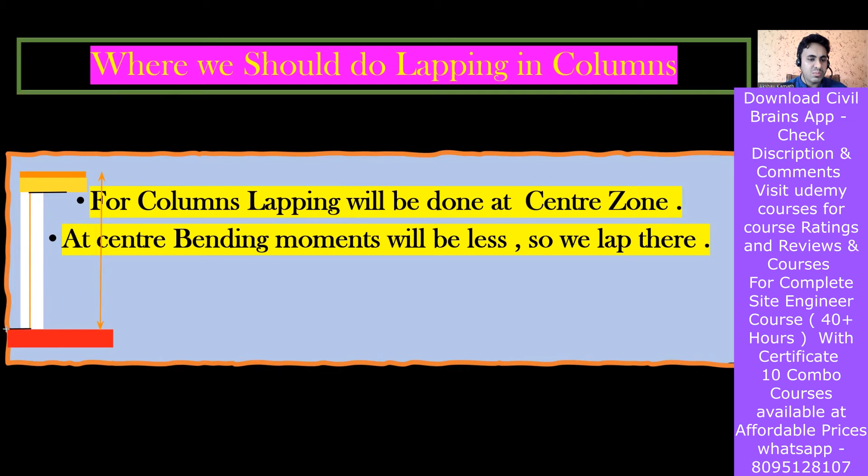The typical bending moment diagram of a column: near the support, here we have maximum bending moment. Here also we have maximum bending moment. And the bending moment becomes minimum in this portion. This is how the bending moment variation happens. Can you see this middle portion? Your bending moment is almost close to zero.

The bending moment is maximum near the bottom and near the top. But as you come towards the center portion, it reduces and finally reaches zero. So this is the zone where the bending moment is minimum, and wherever the bending moment is minimum, we have to do the lapping. If this is the complete height of my column, it comes exactly at the center. So for columns, lapping will be done at the center zone.

Very simple explanation. I've explained the bending moment diagram. I'll quickly make it dark in color so that you get a better idea. Maximum, and this portion is minimum.

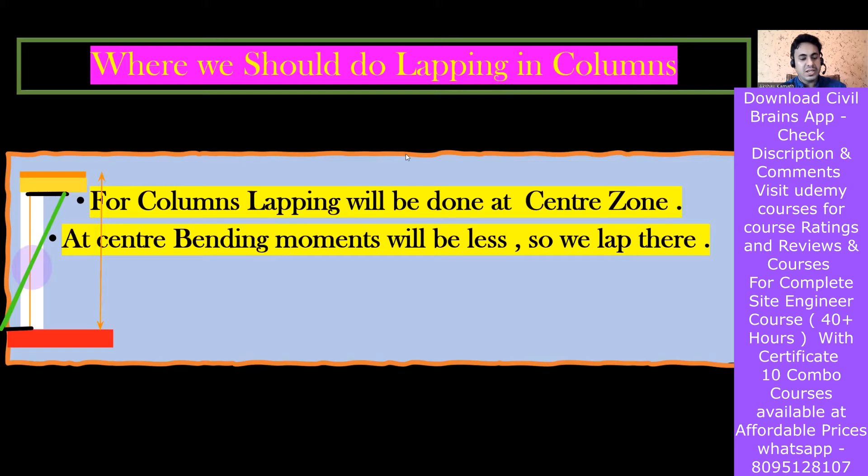Got it? This is how the bending moment variation is going to happen. So in this particular portion the bending moment is 0, or we can say the bending moment is minimum. There I'm going to do the lapping. Now with this understanding, I'll take you to a few of the structural drawings. I'll take you to one of the drawings here.

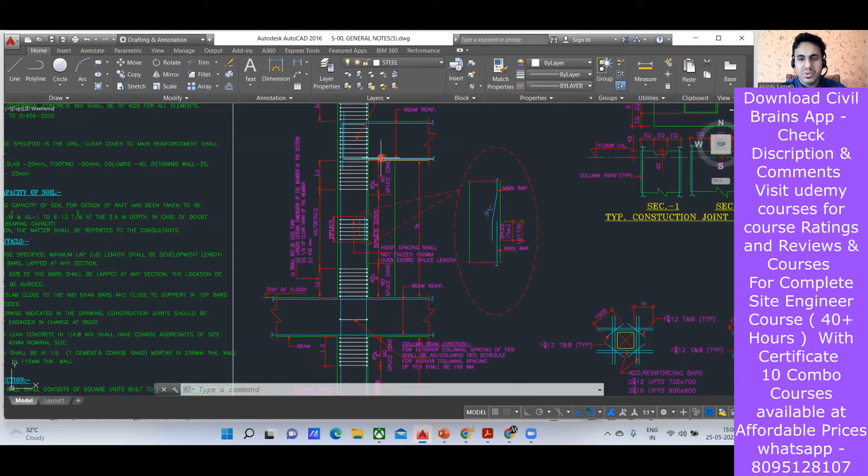See, when you work as a site engineer, you get certain typical drawings, and they are going to mention where you have to do the lapping and where you should not do the lapping. Whatever concept I've explained, you see the same application being done here also. You can see this is the top of a floor and this is the bottom of a beam. This is beam bottom, this much portion, and this is top of the floor.

Now you can see they have written something. Here in the middle portion you can see splice zone. Splice in the sense, I told you about lapping. So you can do the lapping in the center portion. How exactly is it center? See, this is the height I wanted from here. So this is the height I have, isn't it?

Now what is exactly at the center? Can I call this my center portion? Exactly at the center, you can see the lapping has been done, and it's written here splice zone. That is the main thing you're supposed to understand. If somebody asks you where you're going to do the lapping in the column, we do the lapping in the column at the center. The reason is the bending moment is minimum there. That is why we do it.

You can even plot the bending moment diagram, which I have taught you, and explain it in a better way. But here we don't do the lapping, and here also we don't do the lapping. Why? Because there the bending moment is maximum. If you want, I'll quickly do it for you again. If this is a column, in this portion the bending moment will be maximum. Here also it is maximum.

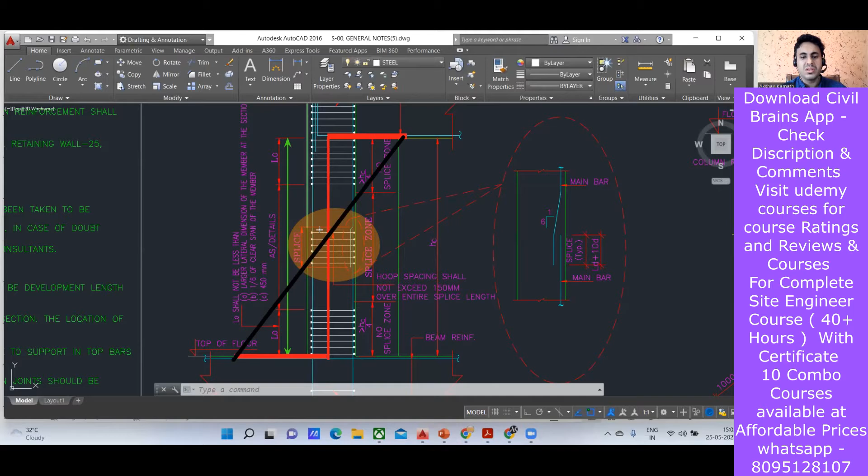And if I try to draw a line there, this is maximum. Here also it is maximum, but here it is almost close to zero, or you can call it minimum. So we do the lapping here. I hope your concepts are clear. That is why they have written all the things in this way. They have shown where you have to do it. It's written splice zone. I'll show you one more drawing for a better understanding.

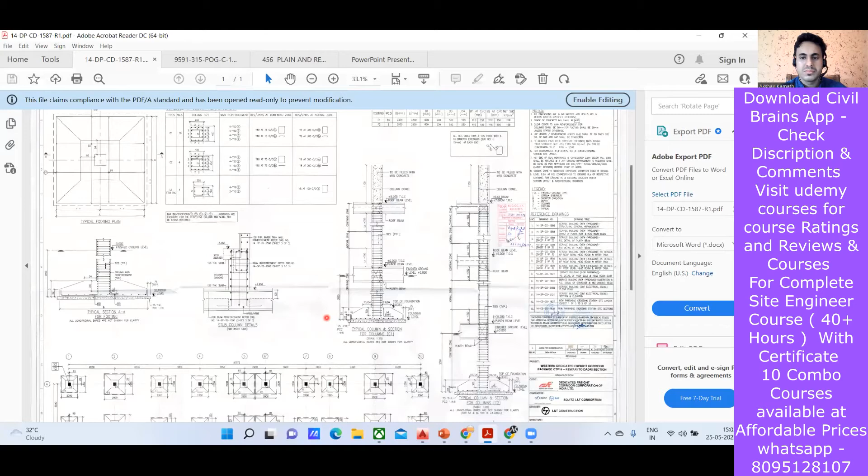You can see it here also. It's not mentioned that you have to do it, but actually the lapping will be done here. This is your height. Up to here, you don't do that. Up to here, you don't do that. In the middle portion, you do the lapping. I'll show you one more drawing. There it is clear.

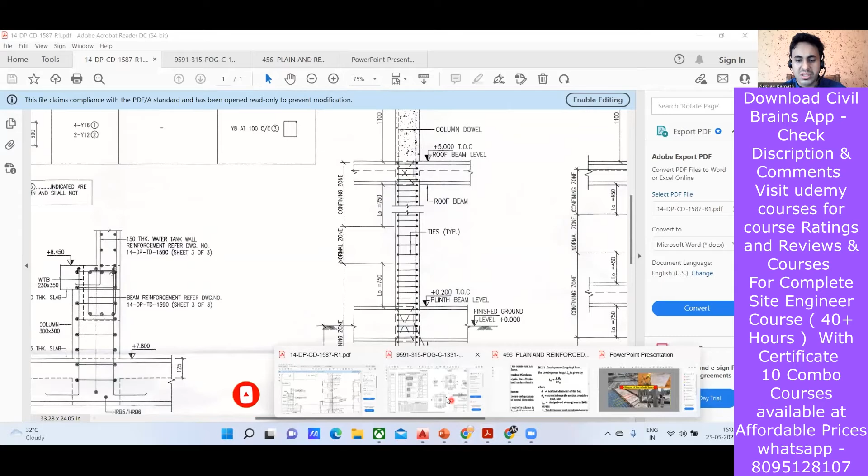So you can see here what is mentioned. LD, that is this much lapping. I told you about the lap length, right? It has to be minimum development length. LD in the sense it's development length, but they have shown it for the lapping. So minimum LD you have to do, and you can see the lapping has been shown here.

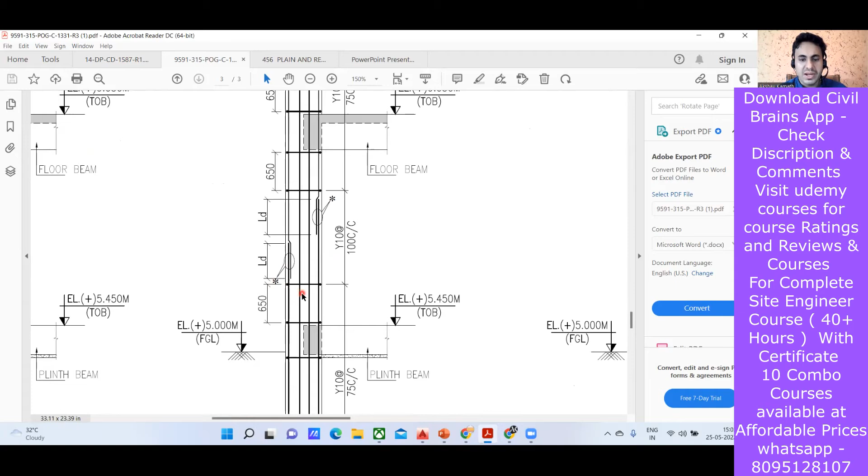And where was that exactly? See, this is a floor beam. This is the top of your beam. TOB stands for top of the beam. From the top of the beam to the bottom floor beam. Yeah, this is your floor beam. Now if this is the height, where is your center portion? The center portion is somewhere here.

So I have to do the lapping in the center portion. Your center portion lies somewhere here. This much is your center portion, and you can see the lapping shown here. You can do the lapping here and here. Within the center you have to do the lapping. So that is how you are supposed to understand the structural drawings, and that is the concept.

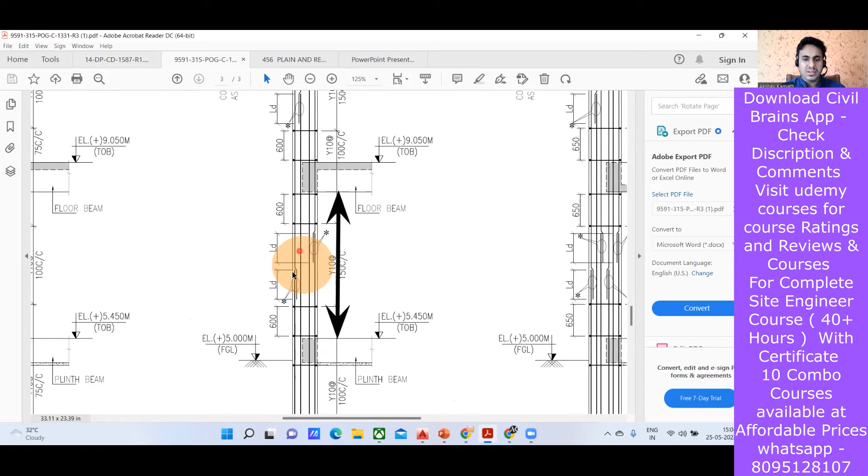And here also you can see the same thing. The lapping has been shown here, and the lapping has been shown here. Why have they shown the lapping here, here and here? We know one more thing: at one particular junction we cannot do more than 50% of the lapping.

Okay, I'll explain that also. Let us say I have 8 diameter. I'll explain here itself. Let us say you have a column. You have 8 longitudinal rebar in a column. All the 8 rebar, you are not going to do the lapping at this point only. All 8 you are not going to do. The code says that only 50% you have to do.

What is 50% of 8 number of bar? 4 number of bar. So 4 number of bar you are going to do the lapping here. Another 4 number of bar you are going to do the lapping here. So that is called a staggered lapping. You cannot lap at one single portion.

See, these are my 4 rebar. These 4 rebar I'm going to lap at this portion. Another 4 rebar I'm going to lap at this portion. Got it? But it will lap in the center portion only, because when I say center, it's not a very small distance. See, this is the height what I have. Consider this height to be 10 meter. Then what will be this height and this height?

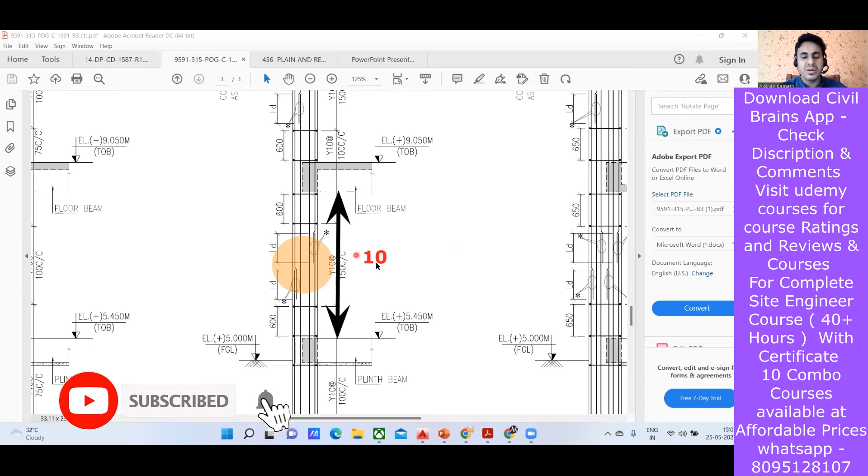Simple raw formula I'm giving. Not divided by 3, divided by 4. H by 4. H by 4 comes out to be how much? 2.5 meter. So from here 2.5 meter. Right? From here your 2.5 meter is gone. From here your 2.5 meter is gone.

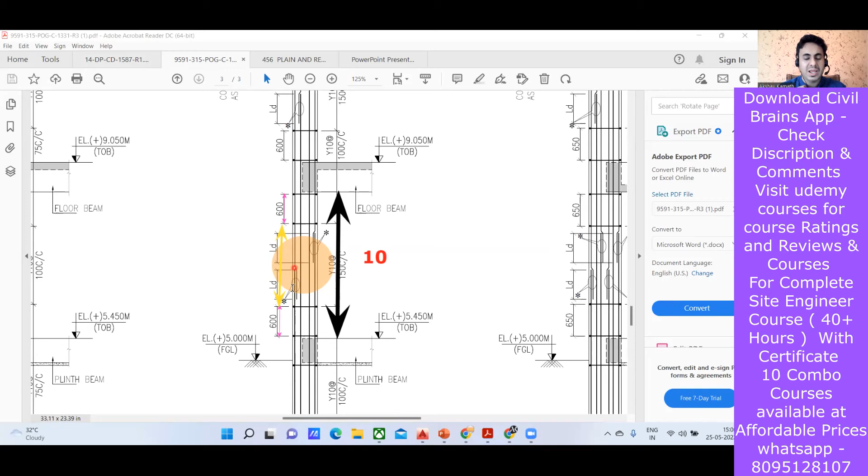How much is left out? 2.5, 2.5, 5 is gone. Another 5 is left out. So that 5 meter is your middle portion. So within this 5 meter you have to do the lapping. 4 rebars lapping I'm going to do here. Another 4 rebars lapping I'm going to do here.

Got it? This is a front view you're seeing, so that is how it looks. But practically 4 rebars will be lapped here, and after that a certain distance we will leave. Actually the code says it has to be 1.3 times the lap length. And then another 4 rebar I'm going to lap in this way. So in this way we are not lapping more than 50% of the bar.

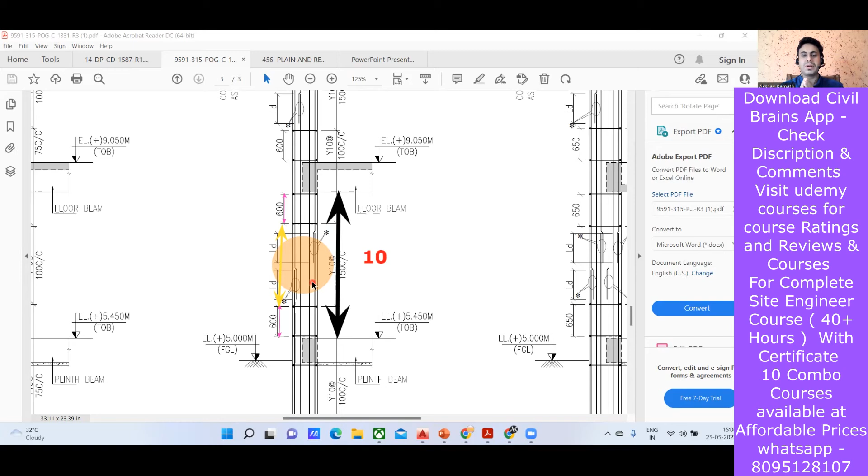Even in the beam the same concept applies. In the beam, if I have 4 rebar, all the 4 bar I will not lap at one portion. 2 I'll lap here, another 2 I'm going to take to the other side and lap. So beam I forgot to explain. Let us see, if this is my beam, I have 4 bar. Then I'll lap 2 rebar here.

I'm going to lap here. And now let us say in the bottom portion also you are supposed to leave the bar. So next bar I won't stop here and lap something like this. Why is that? Because at this particular junction, both the bars are lapped at the same portion. You should not do that, only 50% has to be done.

If there are 4 bars, 2 I'm going to lap here. You are seeing it from the front side; behind this also there are another 2 bars. So instead of adopting this method, I'll run this bar completely. Based on that only you have to cut the rebar. I'll take it here, somewhere here, and I'm going to lap it here.

Now I've done the lapping. Is it more than 50%? No, because in this portion I have lapped it here, whereas here I don't have any lapping. This is for the beams. So more than 50% has not happened. So this is how you do it in the beam.

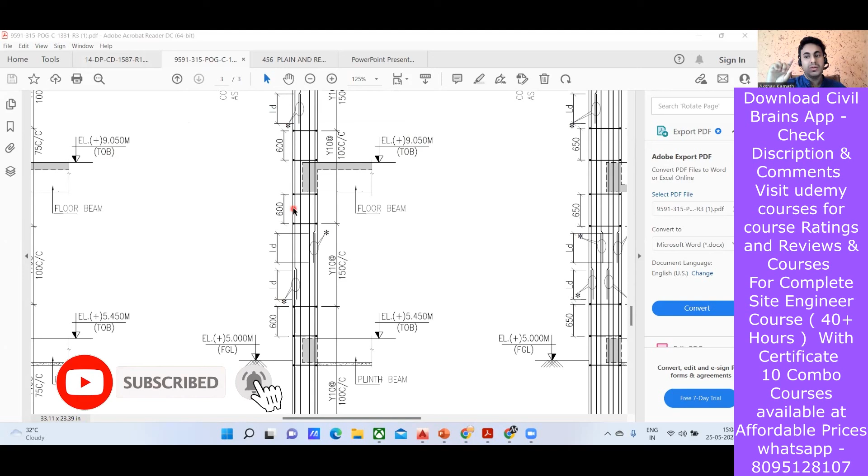I hope up to here your concepts are clear. We understood for the beam. We understood for the column. Column is very simple: at the center of a column you have to lap it, done and dusted.